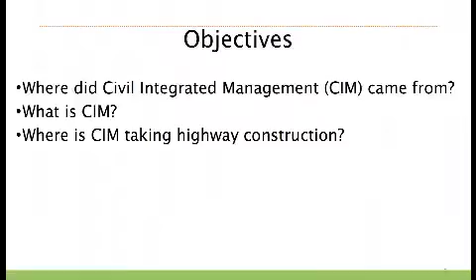Where did CIM come from? Back in August 2009, Federal Highway Administrator Victor Mendez approached AASHTO, AGC, and ARTBA and asked them what could we do to accelerate construction of highway projects. So these groups with Federal Highway got together and looked at what's happening across the nation and proposed some ideas to Federal Highway Administration in 2010 on how we could accelerate construction of highway projects.

The four proposals they came up with were: first, create a utility relocation best practice list. Second, increase sharing of electronic data. Third, more consistent widespread use of innovation. Fourth, encourage teamwork with inspection and construction staff and personnel.

This letter that was sent back to Victor Mendez from this committee was handed over to me, and I was asked to do something with it, make it happen, because we need to accelerate construction within the highway industry. So what I did is I took this letter and I went back to the original committee and asked them, what does all this mean? Please explain to me. Are we looking at technology advancements? Are we looking at policy change? What are we looking at here? What are we talking about?

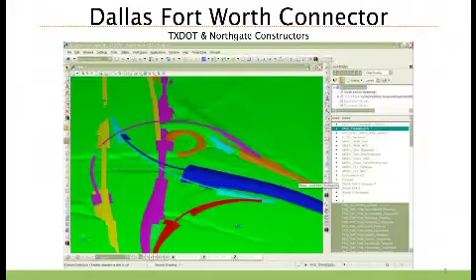Once you take these projects to this 3D stage, quantity takeoffs and stagings, you're able to prioritize and scope out your materials, construction equipment, and means and methods to optimize your operation for cost effectiveness. Once you produce this 3D model, you're able to optimize your materials, your quantities, your equipment, and operations to take advantage of the different stages of this 3D model.

Now as we step into this next image, this is where we take the 3D model into a 4D element, where we incorporate scheduling into the materials, methods, and equipment. This is where you're really, as a contractor and an owner and consultant, able to scope out the project for just-in-time delivery of materials, equipment, and people on the project. This helps a lot with balancing your resources and utilizing their productive efforts to the maximum possibility.

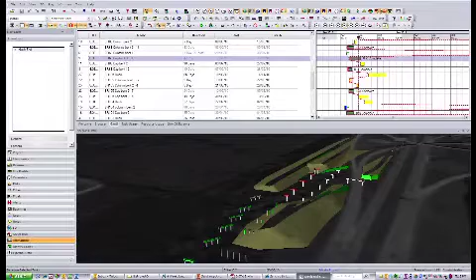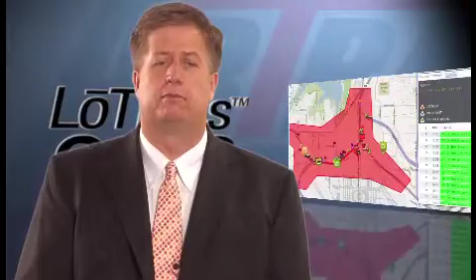I would also add that within the RFQ of this project, it was not required to do this. The construction enterprise used this method to assist them in mitigating the costs associated with this project. It helped them win the project and do it in the most cost-effective means for the traveling public, which we're all trying to accomplish.

One other piece of CIM technology that was used on this project was associated with tracking of their equipment and construction trucks. All the trucks and equipment had a tag associated with them that they were able to link and track and show where their equipment was on the project. This helps out significantly when you're paying your subcontractors for the loads delivered, as well as optimizing your maintenance frequencies with your haul trucks and your equipment. Knowing where it is, what it's doing, what it's hauling throughout the life of the project so you can optimize productivity. That's so critical to us today.

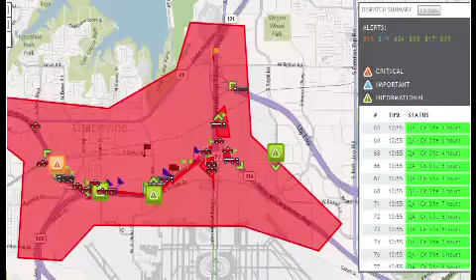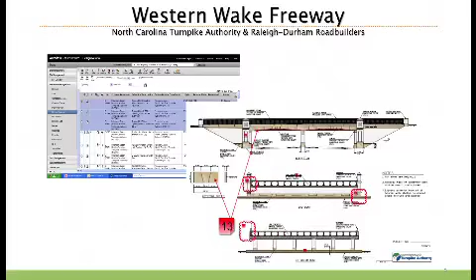Data cloud environment meaning an online system where all parties could interact together and share their information, comments, and approvals as soon as possible. That's what the back screen presents, the tracking of these different documents, where they are, who has them checked out of the online system, and where they are in the status of approval to advance to design. This is one example of an online project management system that's helping us today.

Another example of a CIM technology that was used on the North Carolina project was the use of automatic machine guidance control systems. With the advancement of 3D modeling and automatic machine guidance control systems, we're able to tell our construction equipment the tolerances that we need to build a project.

And with the operator and the output from the automatic machine guidance control systems, we can build projects today more productively. We don't have to repeat and go back and cut and fill our different quantities because we made a mistake or a hub moved or we didn't quite know where the material was going. The automatic machine guidance control systems help us.

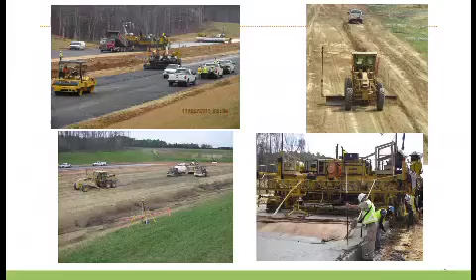Intelligent compaction is another important intelligent construction technology that's associated with civil integrated management. Basically, intelligent compaction takes the energy measurement produced by the piece of equipment and combines it with GPS location to give you a measurement of the firmness of the material that you're compacting.

So what you have to do when using intelligent compaction is first build a test strip and correlate this firmness measurement that intelligent compaction gives you with the respective material's density or density moisture measurement if it's base or subgrade, or its density if it's associated with your asphalt material.

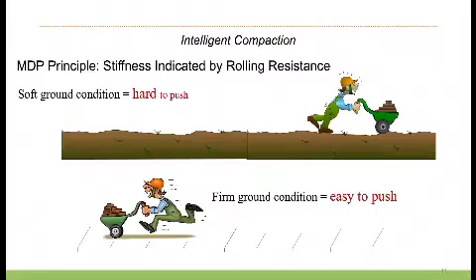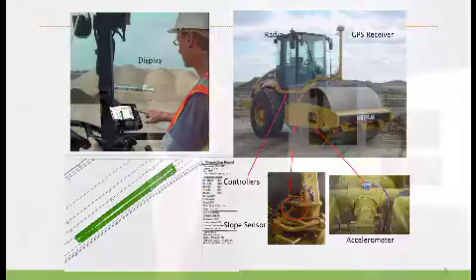But what it shows you is really illustrated in these pictures. In the bottom left-hand side is a picture of the output that comes from the display screen above. Well, what intelligent compaction shows you is where the equipment has been rolling and that firmness measurement. In the bottom left-hand side of the screen is an image of one of the outputs.

You can see in this particular area that based upon the correlation that they did on a 1,000-foot test section and then taking that into full-scale production, that the green area was adequately rolled. But you can see on the turnout areas at the front and at the back, well, the roller didn't necessarily hit all of the pavement area adequately. You can see the white strips. In addition, what you see in this image is that one white strip right in the middle.

What caused that? What caused that on this particular section of road was the pickup machine that was being used to pick up the windrow material and put it into the paver. The scraper on the back side of it was not adjusted low enough to scrape up all the material. So after it went through the paver and came out the back end and went through the rolling operation, adequate compaction did not occur in that center line strip.

With intelligent compaction, the contractor as well as the inspector was able to see this immediately and adjust it respectively and produce the product that was in the contract and what the public expects out on the road. Real-time adjustment and feedback on the quality of the compactive effort of the pavement. That's what's great about intelligent compaction, is the real-time feedback.

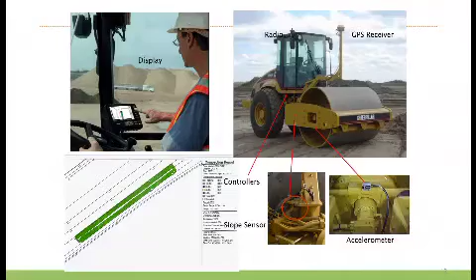Additional tools that are under development to help advance these technologies and this partnering in civil integrated management is we're developing some 2-hour web-based training modules that will be hosted out on different sites. And these training modules will help us teach people construction practices about bridge slide-in technologies, intelligent compaction, stringless asphalt and concrete slip-form paving, and setting up survey controls for automatic machine guidance control systems.

We're also going to be producing some technology briefs that will highlight specific technologies, as well as some separate ones that will produce some project-specific examples. So you can see a project, how it was used, why it was used, and the value it brought to the project for the public. And these will be focusing on 3D, 4D, 5D design and modeling of highway construction projects, automatic machine guidance control systems for earthwork, as well as for paving projects, as well as intelligent compaction.

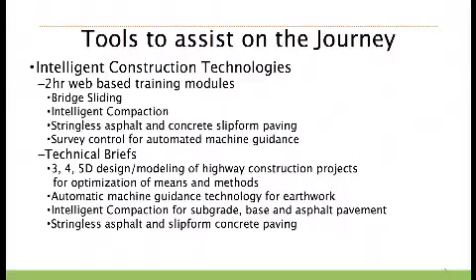In summary, civil integrated management is all about intelligent construction and partnering, working together as contractors, consultants, owners, to produce the projects we need today.